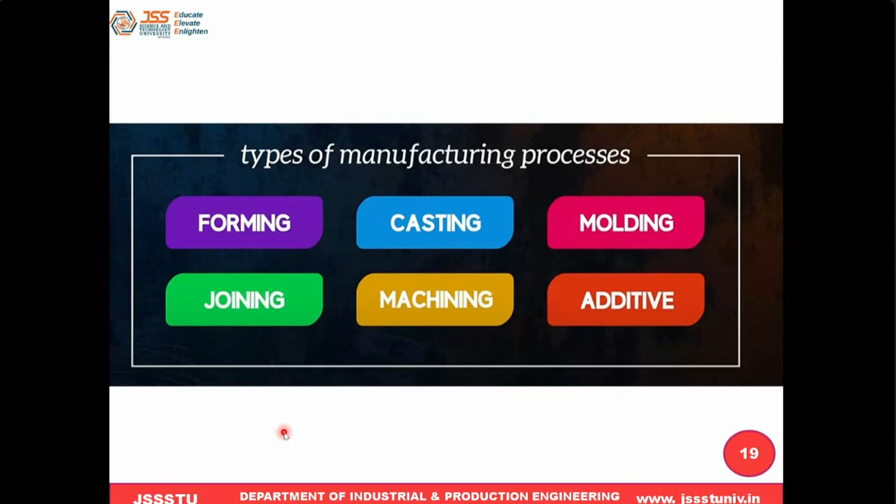Okay, is it okay for you? Okay sir, good sir, yes sir. Okay.

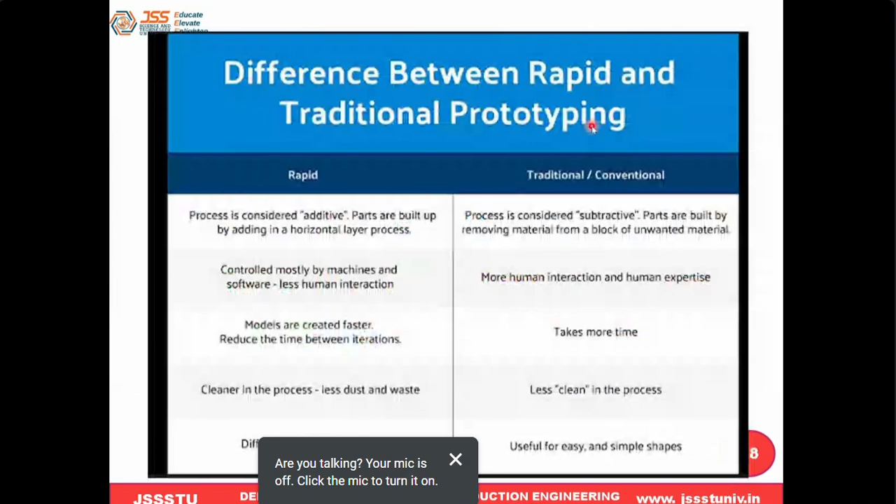Talking about types of manufacturing process, this is called rapid manufacturing. Rapid manufacturing means, as its name indicates, we follow a manufacturing process where we produce the prototype in a very faster way.

So basically I will tell you about the prototype first. You know what a prototype is, right? Prototype is a proof of concept.

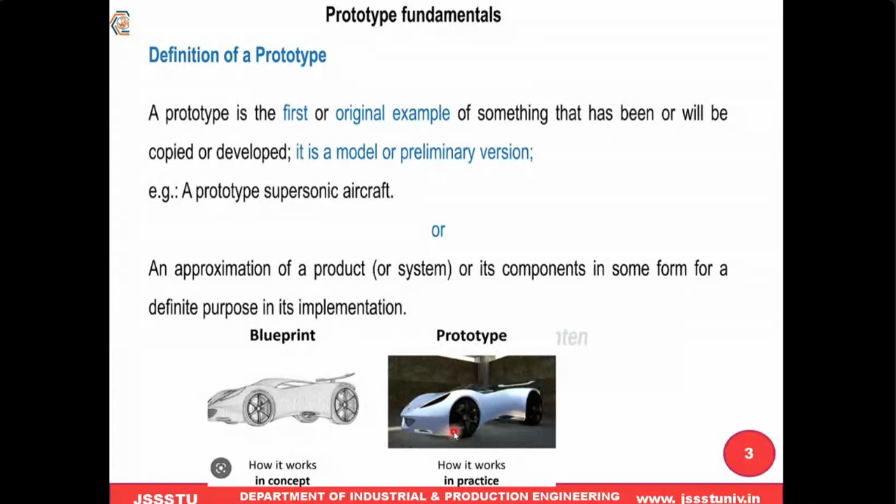So that prototype is the proof of concept. Basically, the prototype's main purpose is for experimentation.

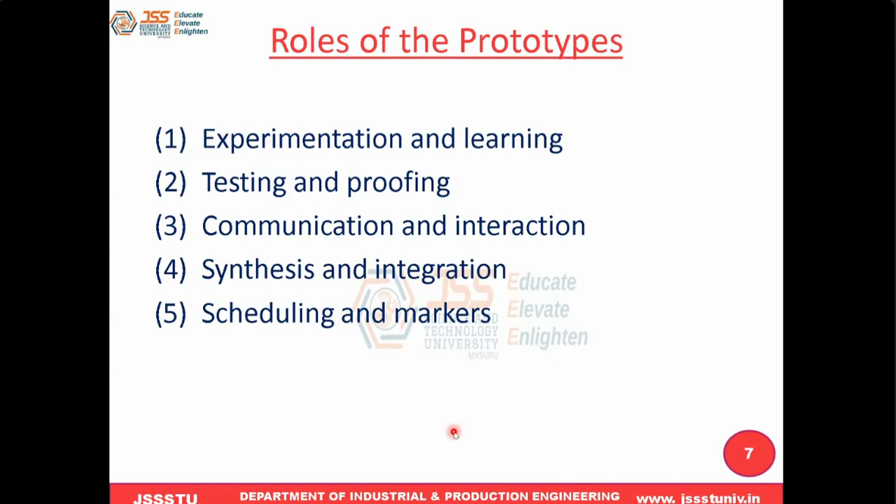Rapid prototype means, as its name indicates, in a very faster way we need to produce that prototype, test it, and finalize our idea.

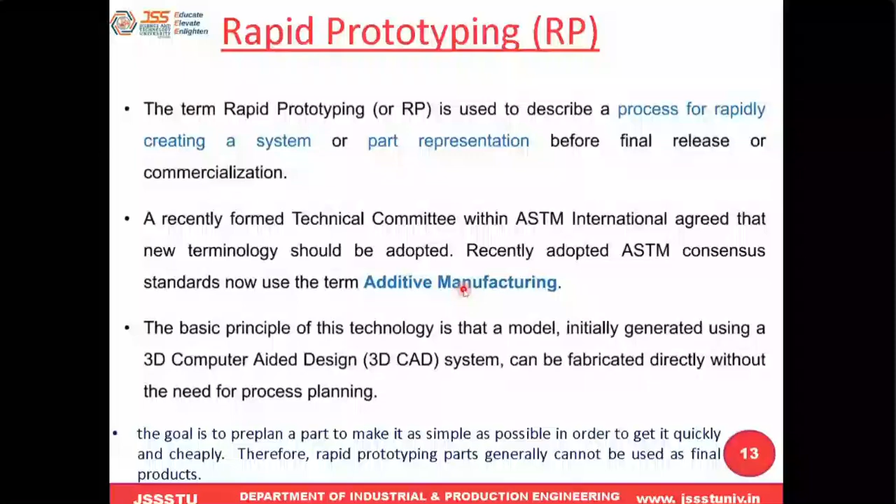Now we are across the digital world, so we are going to use CAD software. In the CAD software, whatever we thought, we can rebuild the product in digital form and visualize it as if it's a real product. You can see one of the things we're showing here.

There, it is also a digital type, but it is not physically present, it is digitally present. So, as a viewer, I can show my proof of concept with a digital proof to others - I can explain to others what my idea is. So this is called the digital type of prototype; it's also called a solid prototype.

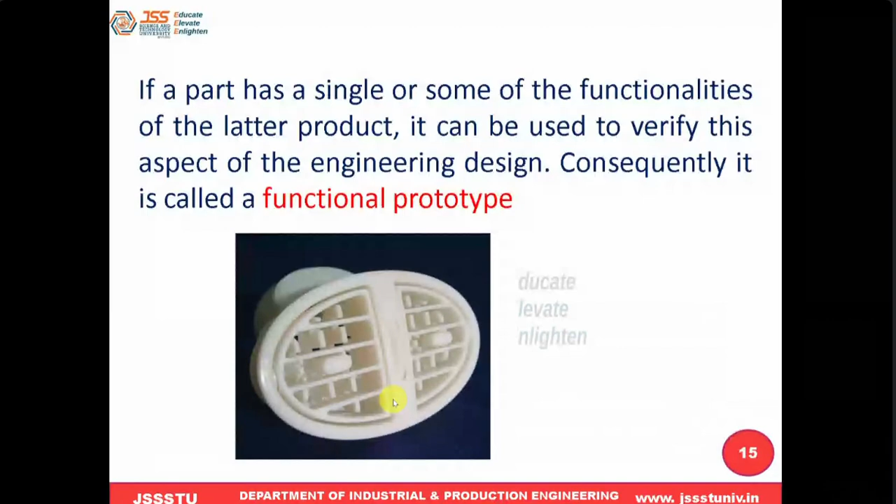So let me understand this 3D printing process. What is that? 3D printing, basically, as simple as it is, I'm telling you it's a modern technique, but basically it's not a modern technique. It's a very old technique only, that is called... let me first read the definition of this AM.

Additive manufacturing refers to a process by which 3D design data is used to build up a component layer by layer. That means we are going to produce the product by, instead of removing the material, adding the material. This is called additive. As I told you, machining is called subtractive. Subtractive means it's going to remove the material layer by layer with the help of a tool. But additive is entirely reverse. Instead of removing, they are going to add the material layer by layer and produce it directly in a 3D form. That is called the additive manufacturing process.

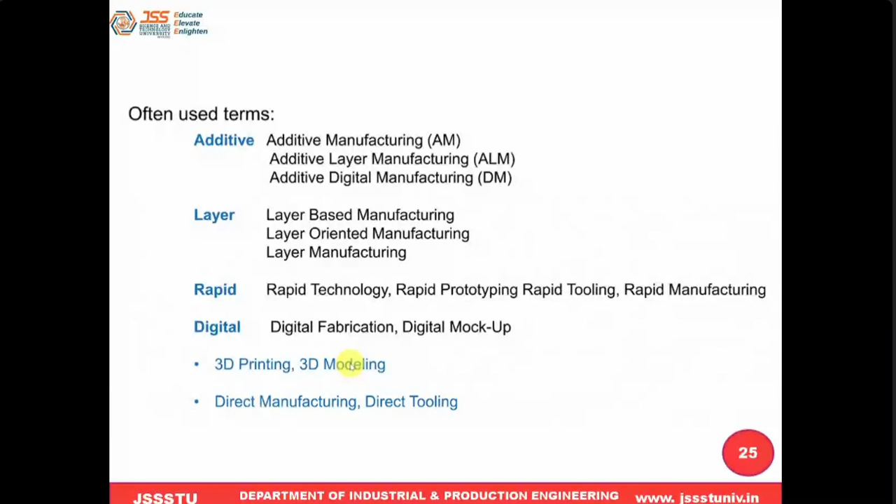This, I'm telling you, is a modern technique, but actually it is not a modern technique. Can you tell me which type of oldest traditional method it uses, what old technique this is, can you tell me?

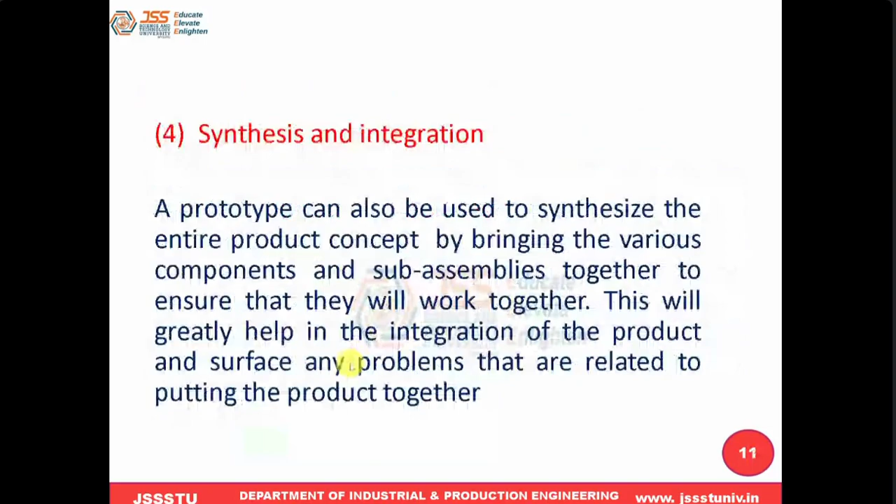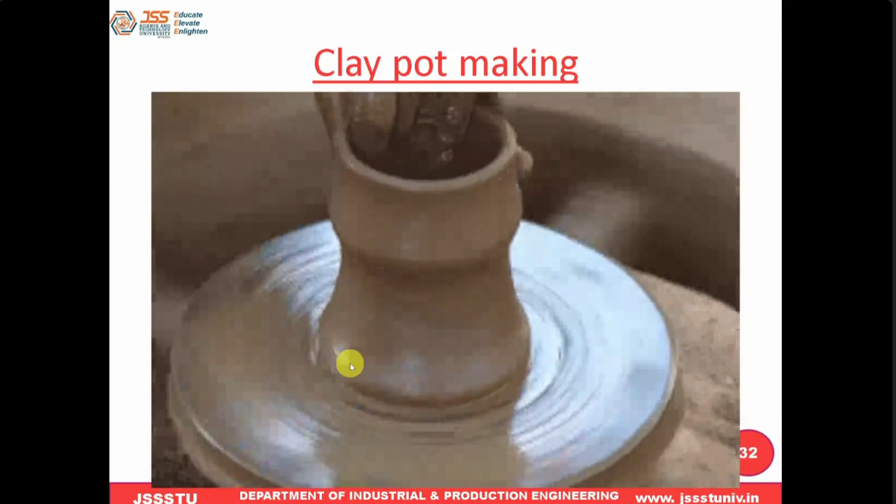Layer by layer, what do they do here? They add the clay and we are going to build the shapes. The same technique we are going to follow here. Nothing more. Additive is nothing more than that. This is only the technique. They are going to add the material layer by layer to make it as the required shape. That is only what they call the 3D printing process.

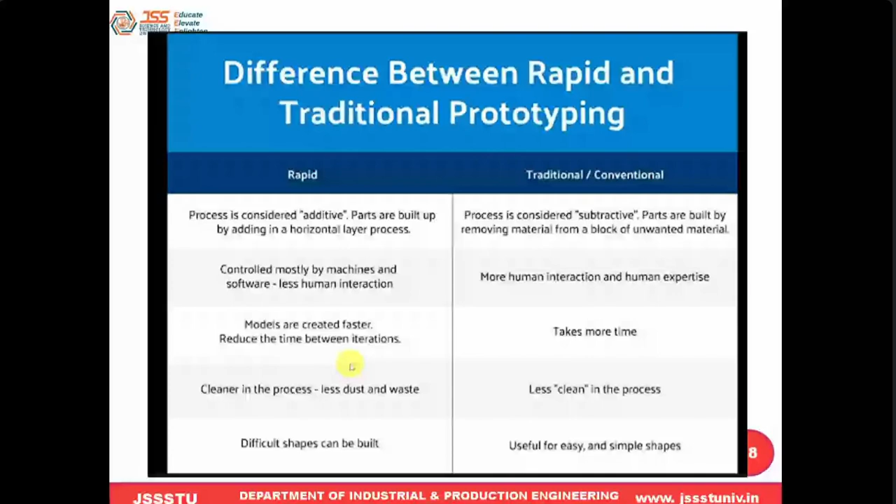So we got to know what is additive. Basically, this additive, if you take the difference between this rapid prototype and traditional prototype, what does this mean? So the process is considered additive: parts are built up by adding layer by layer, whereas subtractive is built by removing the material layer by layer.

Most things here in rapid prototype are controlled by machines as well as software, therefore less human interaction. But in the traditional or conventional type of technique, we require more human interaction. Nowadays we also use CNC, which also comes with less interaction only. We can say that models are created in a much faster way, therefore it will reduce the time of iterations. But here it takes more time.

So it's a cleaner process because it produces less waste, whereas here it's less clean because it produces more waste. Any complicated shapes can be built directly using rapid prototyping, whereas here it can only produce the easiest, simple type of shapes. But if you want to produce complex shapes, you require a lot of different special kinds of machines.

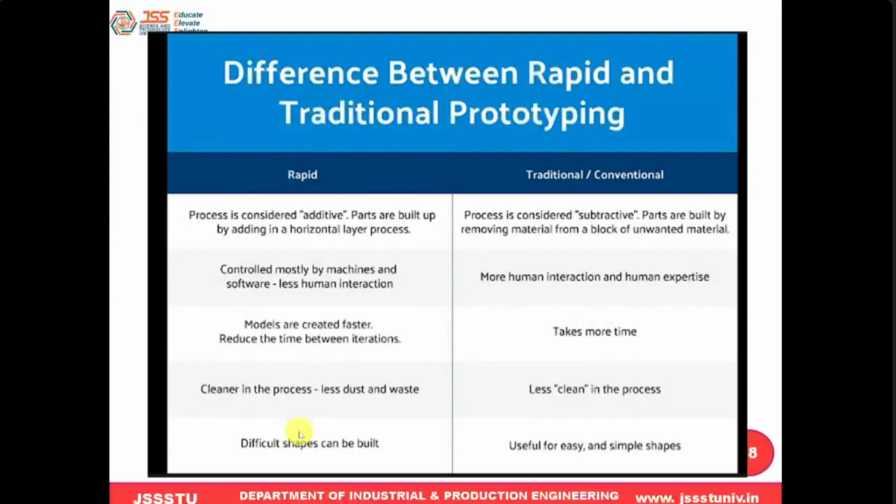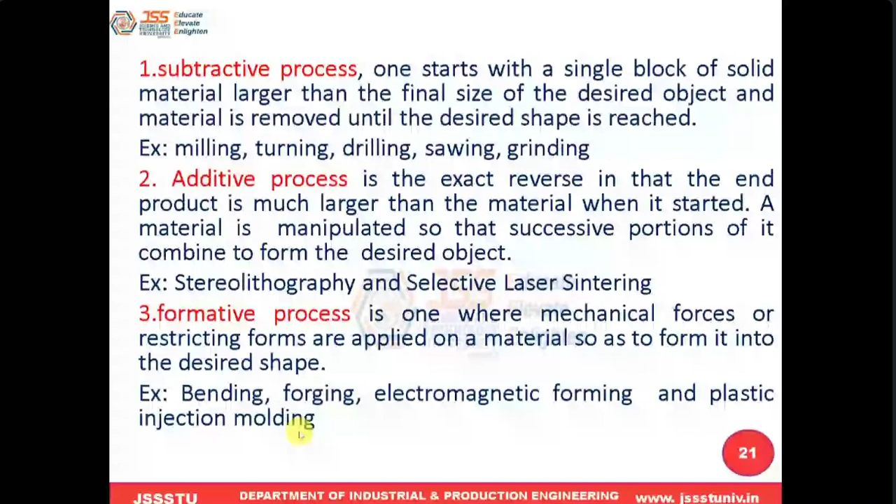Additive means layer by layer they are going to add it, that is called 3D printing. And formative means with the help of force we are going to produce the process.

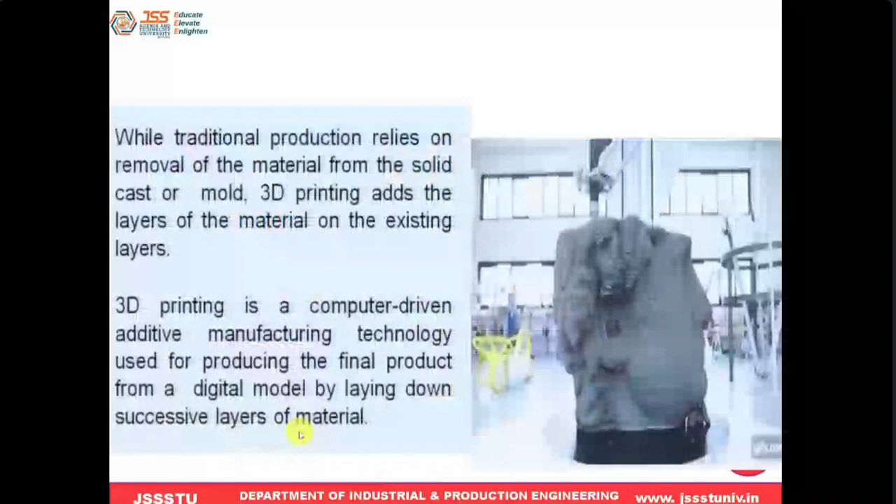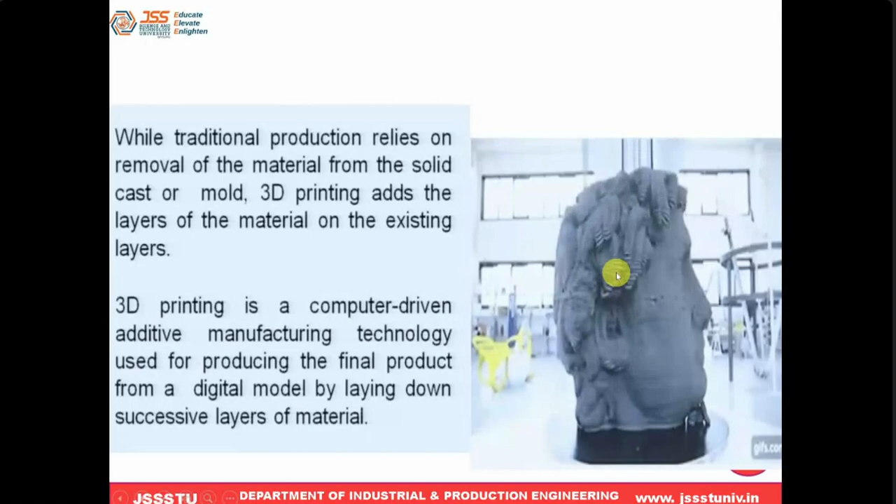So now, a very important thing: in additive manufacturing, what are the steps? You can see here how layer by layer is added. In the animations, you can see this layer by layer adding and producing. You can see this is one of the monuments. So however complicated the shapes may be, you can see that it can be easily produced using the 3D printing process.

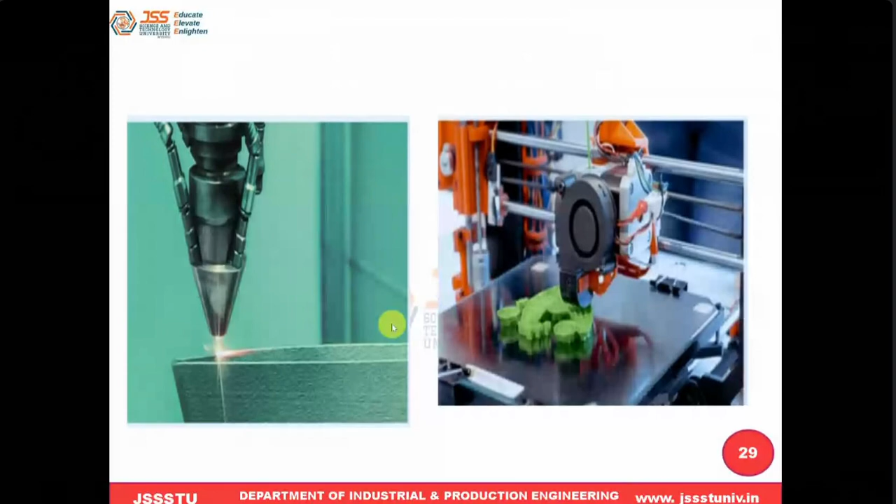So 3D printing process is basically adding the material step by step. I will play this video, it's playing now, it is continuous. It is playing also now for you.

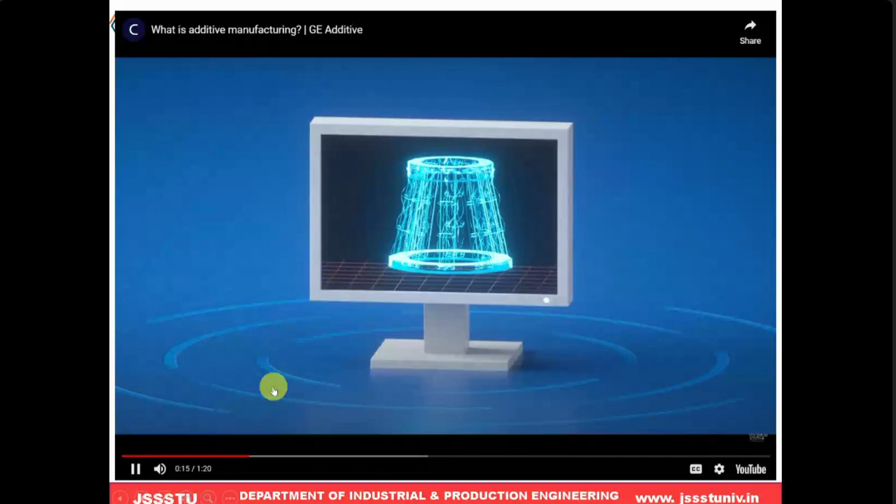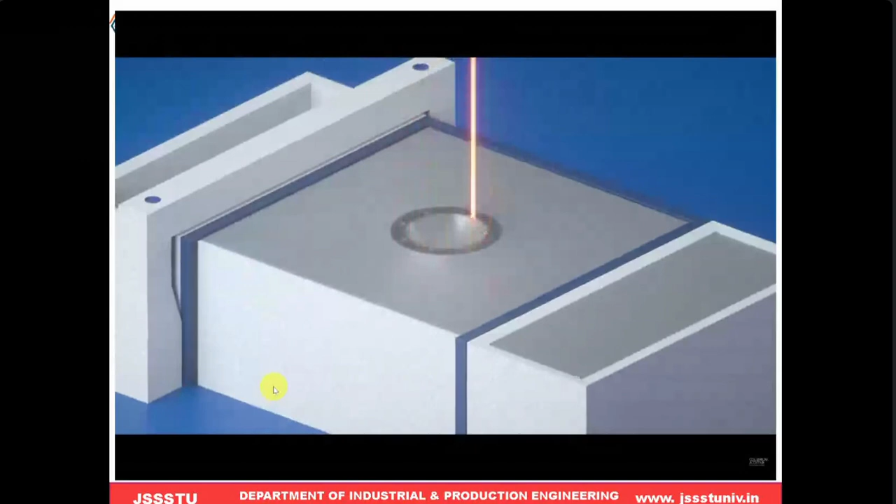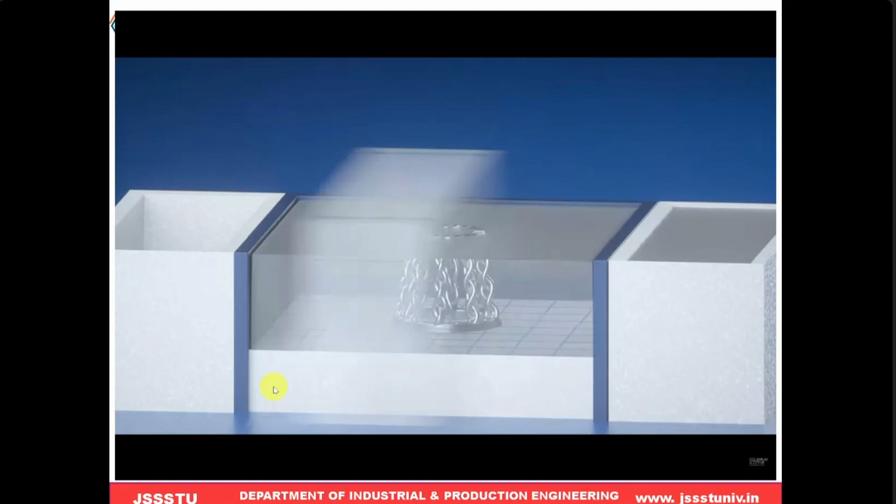3D printing is a process that creates a physical object from digital design. An engineer designs the object using CAD software. The 3D design file is then sliced into thin layers and uploaded to an additive manufacturing machine. The process begins once an extremely thin layer of metal powder is spread across the platform. A heat source, such as laser or electron beam, melts the first layer of the design. The platform is lowered, and another layer of metal powder is spread. The layering and melting process is repeated until the part is complete. The metallic powder is removed, and a physical object is revealed. Additive manufacturing allows you to produce parts that are lighter, stronger, and more durable than traditionally made parts.

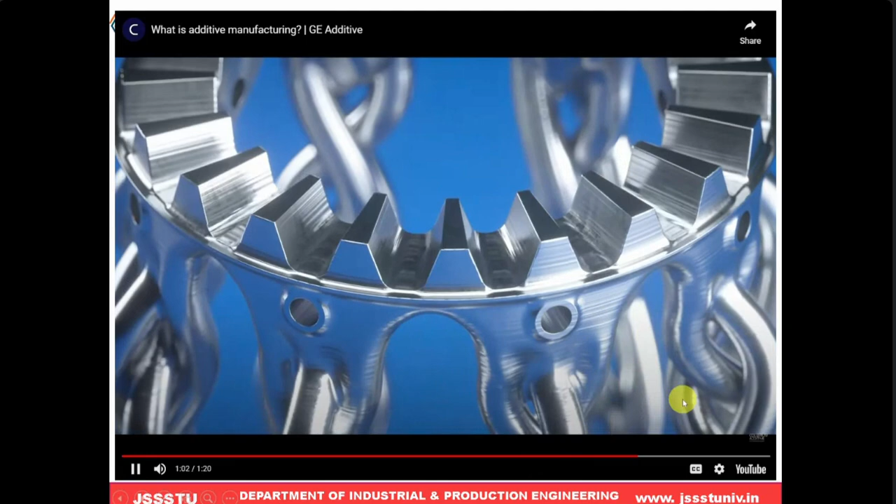So now the way manufacturing is done has been completely changed by implementing this additive manufacturing.

And complex shapes we can produce. That is the greatest advantage of this additive manufacturing.

So now we got to know additive manufacturing. If you take the history of this, actually...

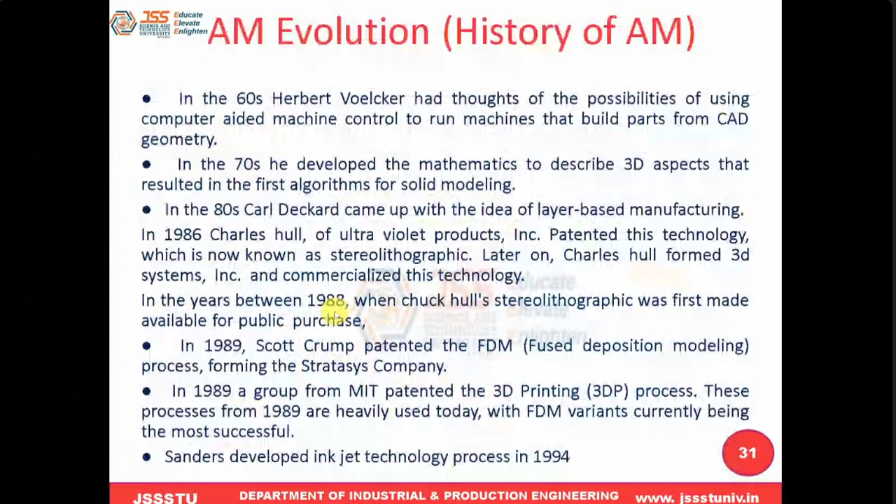In the 1980s it started by Carl Deckard. That's where it started. But now it is everywhere, they're going to use it. It started from 1980s actually. The very oldest technique was called the clay pot technique. Okay, so you can see this here.

What is the difference between subtractive and additive manufacturing? You can see this in the figure.

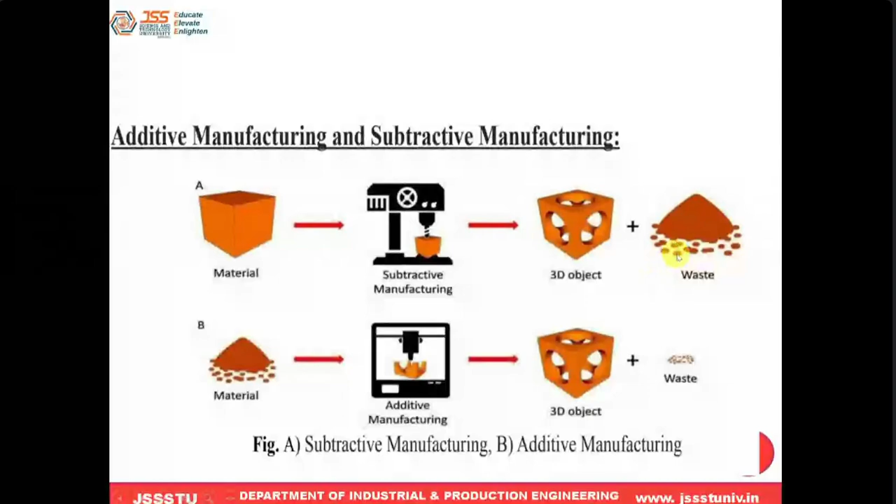So, in order to produce the same product, they take raw material and use a drilling machine. They remove material and produce this. But here it is completely reverse. They take the material in the form of powder, and using additive manufacturing, they add the material and produce the same product. But while producing with the subtractive process, we can see how much waste is produced, whereas here it is very minimal.

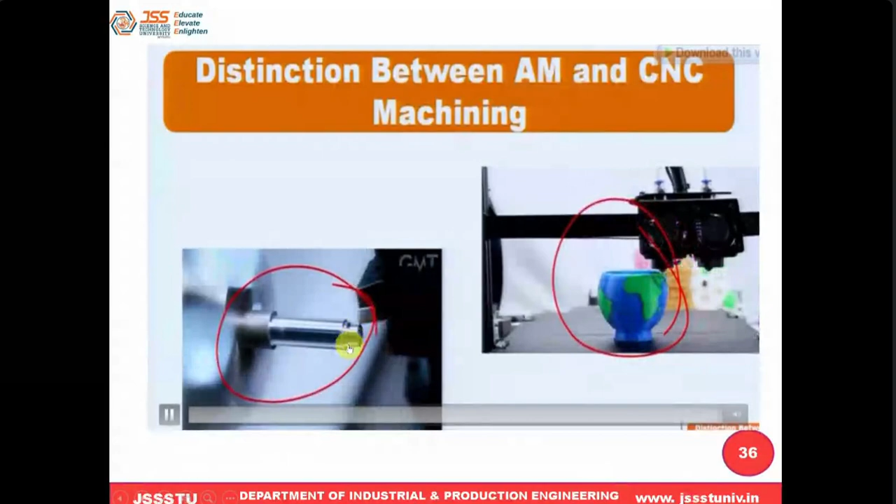So therefore, you can see in the video here also, a basic comparison of additive and CNC machining. CNC machine is basically a subtractive process that removes material. This is the additive manufacturing process.

So, okay, now I come to the very important thing.

What are the steps involved in the AM process? For any 3D printing, there are a series of steps you need to follow. Now I'm taking that up.

First step, CAD. Second step, STL conversion. Third step, file transfer to the machine. Fourth step, machine setup. Fifth step, build. Sixth, remove. Next, post processing. And finally, we go for the application. There are totally 8 steps that take place in any additive manufacturing process.

First step is CAD. Here, in additive manufacturing, whatever product you want to produce, first using a CAD software we need to build a 3D model, and that 3D model is the main input for the additive 3D printing machine.

So therefore, first we need to build the model using any third party CAD software. What are the things we need to manufacture things? First step is we need to prepare that model, like a digital prototype, what we call it, using a CAD software. We need to prepare that actual model using any third party CAD software.

Now the second step we have to do is the conversion to STL. Conversion to STL means it is called stereolithography - STL is the abbreviation of stereolithography. So what we will do here, when you convert into STL format, as you know in CAD software, in the CAD subject you studied like graphic interaction, there are different types of CAD file formats.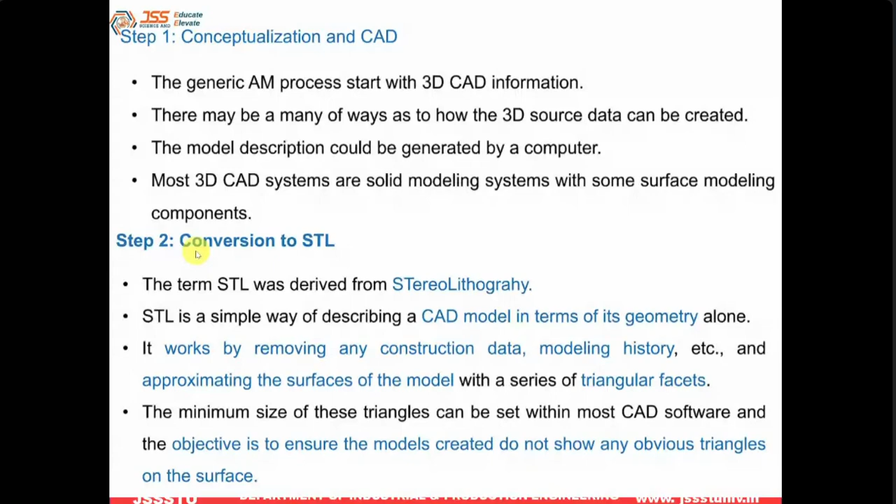Now we are explaining the steps involved in the AM process. Take an example of this tip, the coffee cup saucer. So first here, they are building the coffee saucer as a 3D model. Then they convert and save the file in STL format.

When we save the file in STL format, the file is converted into stereolithography format, and all the solid surfaces are converted into triangular facets. So you can see here a series of triangular facets.

It is the same thing as in ANSYS, how we convert our 3D model into a meshing process. Using a meshing process, we divide the part. In the same way, that is what happens in the 3D printing machine.

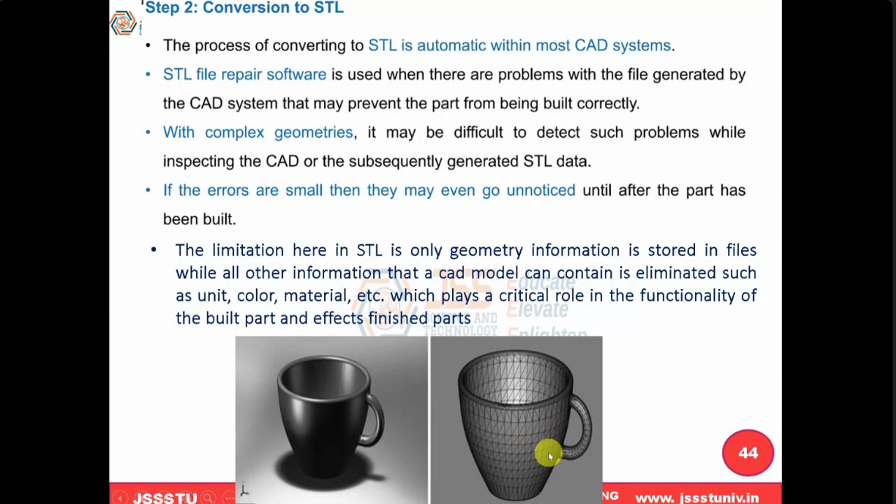In order to read the file, the machine requires an STL file - only that it will read; other formats it will not understand. So therefore, we convert into the STL file, which is the stereolithography format. It converts all solid bodies into triangular 2D facets. That is called conversion to STL.

Next step is transfer to the AM machine. Once we convert into STL format, we transfer that file to the 3D printing machine. Once we transfer it, the machine reads the STL file, analyzes that file, and validates it first, checking for errors.

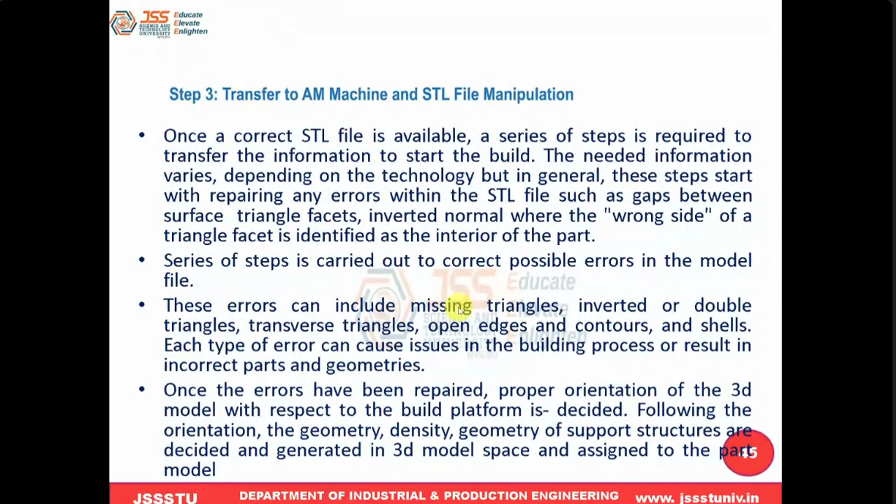So once that is done, the next step is machine setup.

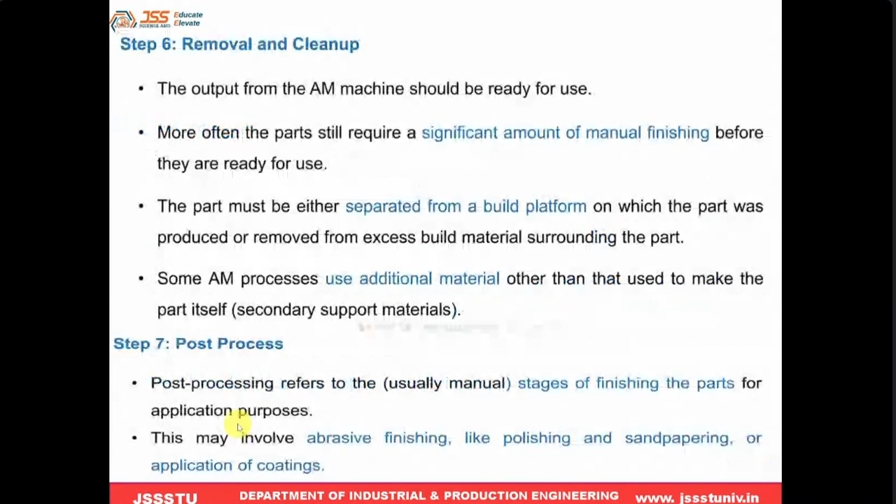So totally there are 8 steps involved in this 3D printing. So with respect to this example, I will repeat this once again. First step, example is CAD model. So in order to build this teacup saucer, they have prepared the CAD model.

Then it is converted into which format? STL format. Then it is converted to which file format? STL file - all the 3D body is converted to 2D triangular facets.

Next, third step is to transfer this STL file into the AM machine and check for any error. Next one is machine setup. So then after that building, it started printing.

But it will divide the material - it will divide all the slicing file into number of layers using slicing software. Then it is started to print. Then finally, sixth step is remove.

Remove in the sense, once the product is printed, carefully it will remove it from the machine bed, and finally go for any kind of post processing that is required. So finally, it is ready for the application.

So that means in the entire summary of this AM process, it starts with a digital product and finally it is converted to a physical product. So this cup is used to serve coffee or tea, right? That is the final purpose application.

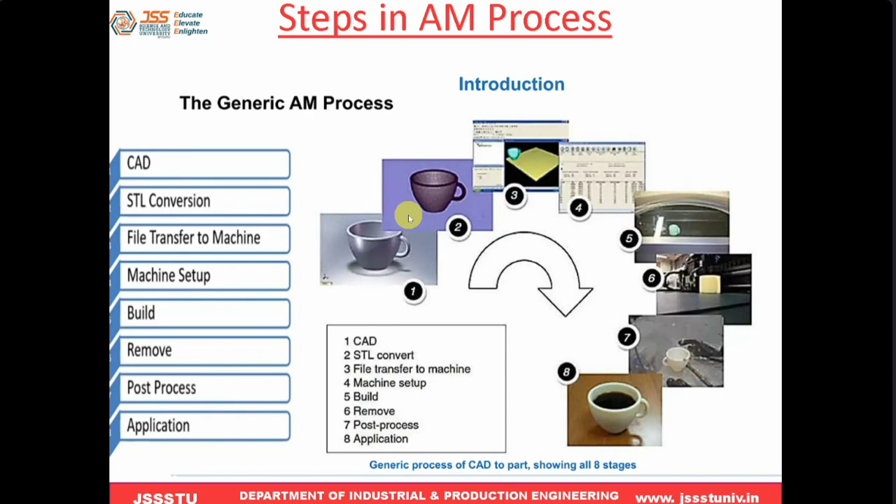So in any 3D printing process, these steps are common. This is about the very important things.

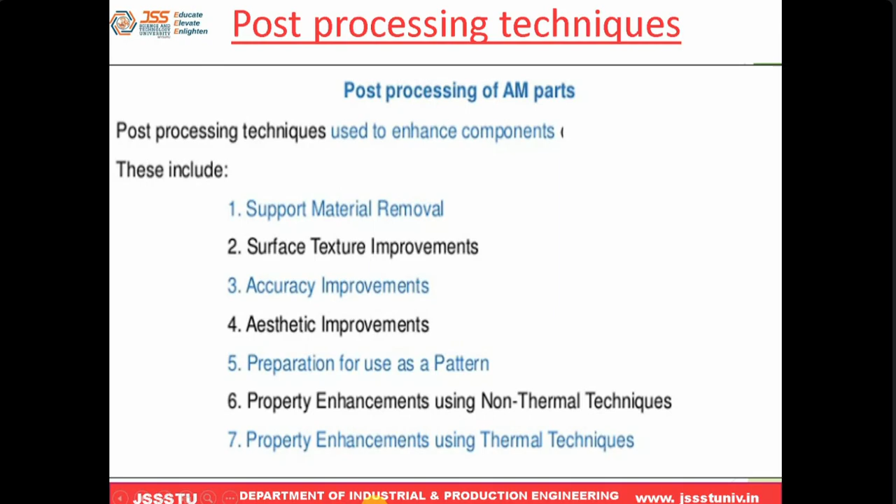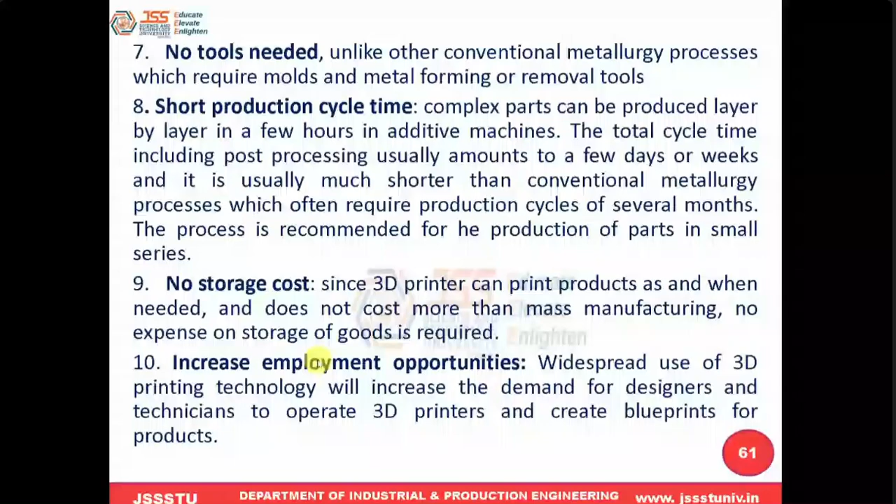So all these are advantages, but there are limitations. The limitation is it is only applicable for small production, not for large production. Maximum we can produce by this method is 25,000 parts per year.

Support material removal - that is a big issue. I told you, you cannot directly take it out.

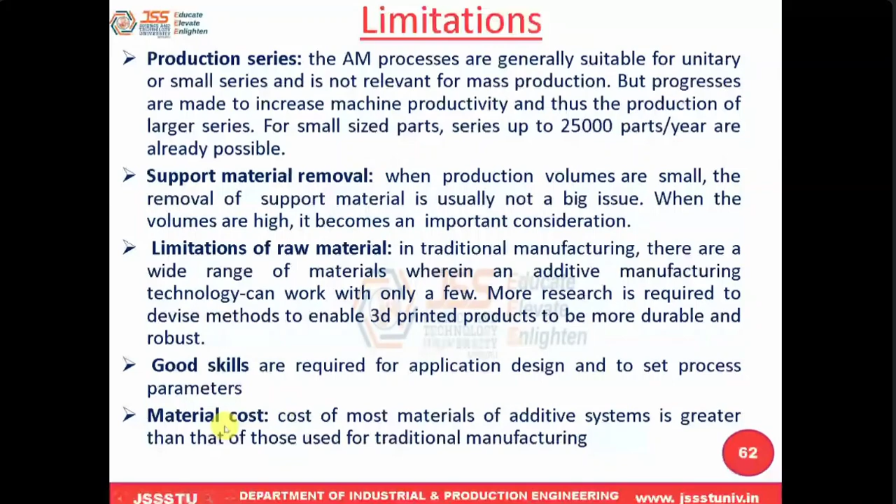Limitation for raw material - not all types of material can be useful, only some limited materials we can use, and good skill is required. Obviously material cost is more. These are some of the disadvantages.

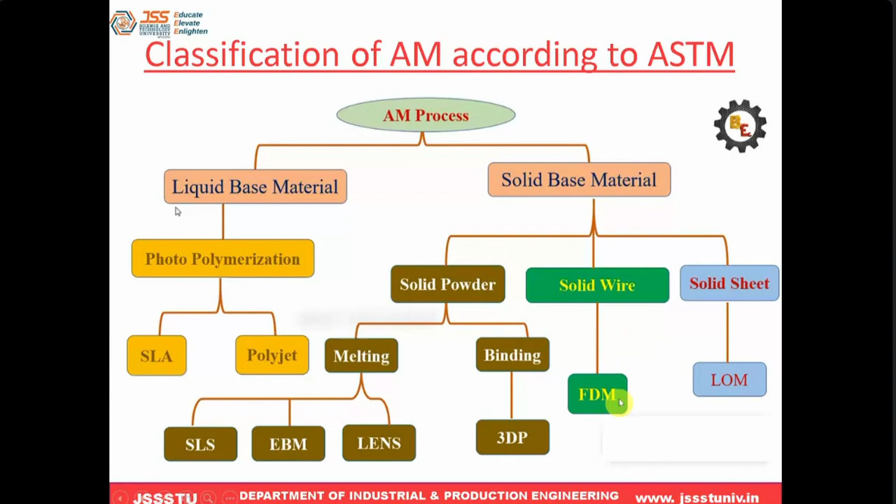So SLA means stereolithography. SLS means selective laser sintering. EBM... fused deposition model, FDM. LOM means laminated object model. These are the different manufacturing processes in AM.